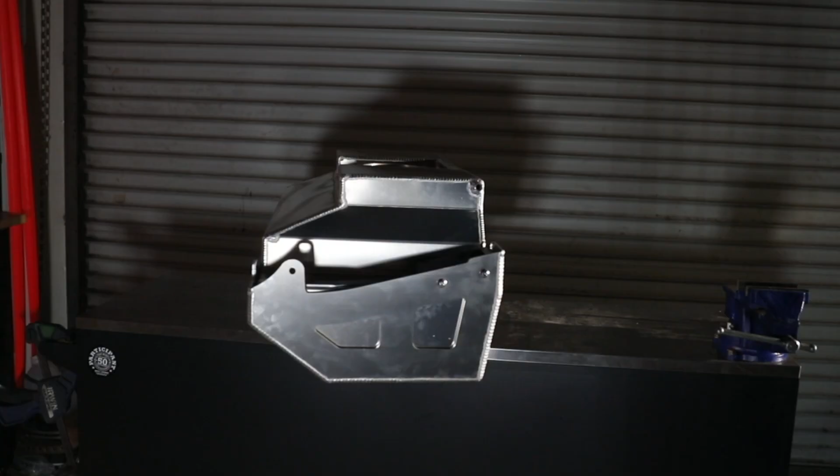Gas tanks were my very first product that I ever did. It was born out of my own necessity. I had put a Dana 60 rear end in the back of my YJ, went out the driveway, and bam, that rear end hit the tank, the stock tank, mind you, with an aftermarket skid plate. And I realized, hey, this isn't gonna work. I talked to a few people, everybody said, oh yeah, we just shortened the wheelbase a little bit, and I was like, no, that is absolutely the wrong way to go. I'm putting a bigger axle in to run bigger tires. You want a longer wheelbase. Shortening the wheelbase was absolutely not an option.

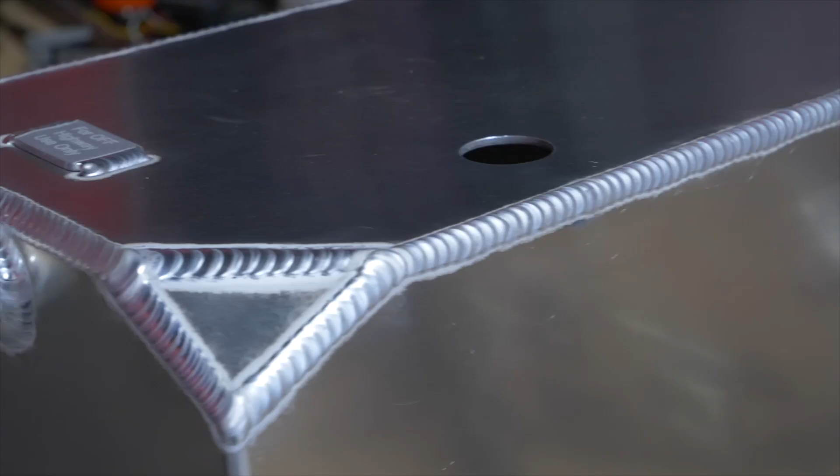I designed and built a tank that had a recess in it to allow the bigger rear differential to clear the gas tank, mated it with a steel skid plate, and this baby was born. It accepted the factory YJ pump module. We reused all factory Mopar vent valves and gaskets, and that tied back into the charcoal canister and the evap system. We did billet machined fittings to accept all the factory hoses, and basically it was a replacement tank with a slightly different shape. And we included things like baffles so that the fuel didn't slosh from side to side. These little holes just allow the fuel to move slowly, and things like this were really game changers in the whole design of the tank.

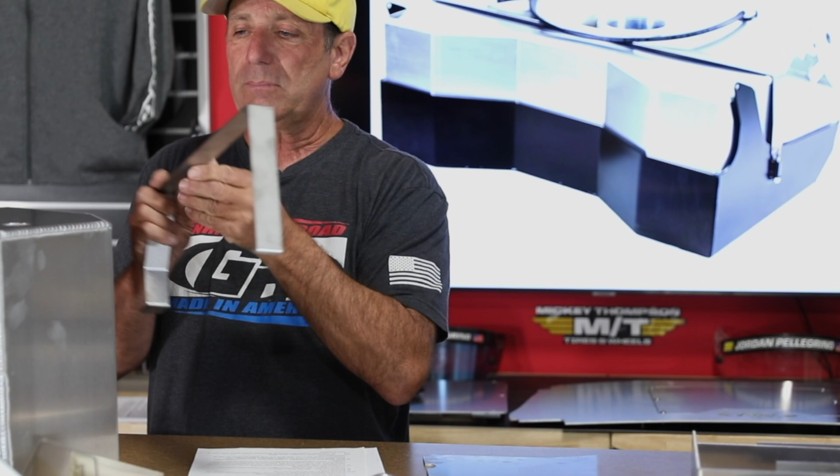And then on top of that, we held the whole thing in with stainless steel straps to lock them into the skid plate so that in the event of any kind of trouble, that tank would stay with the skid plate. So really innovative for its time. Keep in mind, this was 20 years ago we did this.

And now we make tanks for CJs, YJs, TJs, LJs, JKs, XJs, and JLs. So we've got a wide range. And by the way, there's 30 different models in all of that. So we do some with extra capacity. We do some that give you extra room. So you can go over on our website and check out all the different varieties we have for your vehicle. You can go to shop by vehicle, or you can just go straight to products, and that'll take you right to gas tanks.

So now I know you're wondering yourself, why does this apply to me, right? Well, if you wanted to carry an extra 5 or 10 gallons of fuel without having to wrestle with gas cans, one of our gas tanks may be the right solution for you, because it keeps it all down low, protected with a skid plate. You're not having to mess with fuel and transferring fuel.

Or if you want to stretch your wheelbase, just like I was showing you here, where you could move that rear axle back, a bigger rear axle on top of that, move it back, and we make different amounts of stretch, 3-inch, 5-inch, 7-inch, 9-inch. We've got all kinds of different options for you. Or if you want a 4-link rear end, like one of the current JK or JLs, you're gonna need one of our tanks. You gotta move it from the side, get rid of that, move it to the rear, and again, still reuse all your factory fuel pump, evap system, everything.

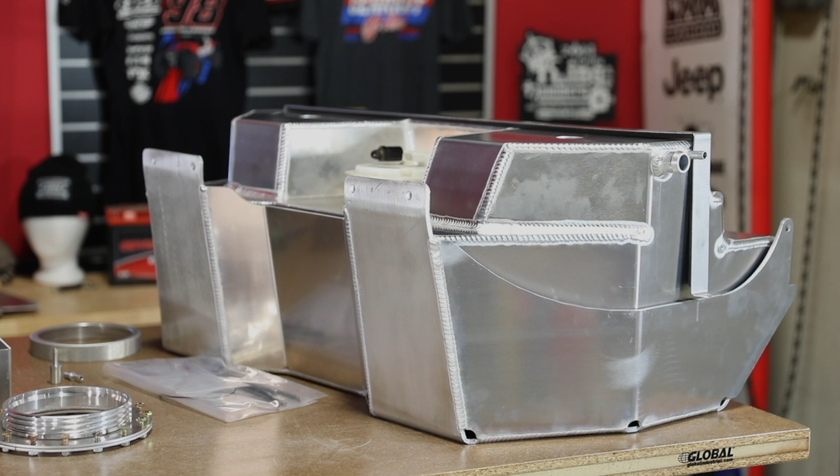Those are all things that having an in-tank fuel pump is going to help with, and this gives you that ability. Lastly, maybe you just want a bigger tank, maybe you want 5 to 10 more gallons of fuel, and what that's going to do is allow you to carry it in the tank that's mounted underneath. You're not wrestling with gas cans.

We offer aluminum skid plates, steel skid plates. Like I mentioned, they're all strapped in with stainless steel, a single strap or double straps, and they retain your factory fuel pump along with the factory Mopar vent valves, two of them on each side, really nice. All these things reattach to your evap system, your charcoal canister, and are not going to give you check engine lights on your dash or mess with your OBD2 system.

So a lot of things have been incorporated in here that really make putting one of these gas tanks in super easy, and like I said, it sets the stage for everything else that you want to do on your Jeep. All right, let's go and start talking about the specific models.

Oh, I just hit the wrong button.

Okay, so here's a good example. When we did our Tracer LJ, we came up with a 7-inch stretch tank that holds 26 gallons. So even though you're getting the stretch, you're still able to carry a large amount of gas. Over the years, we've been able to better design each of these tanks and maximize the space that's underneath the Jeep. And I'll give you an example.

So we start out with our EXT that gives you like 4 to 5 inches of stretch. All of this depends on the rear axle you have. Our Comp, or New Comp, which is 6 to 7 inches. Our Alien, 8 to 9 inches. Our Extended Range, which gives you 5 more gallons. Or our Safari, which gives you 11 more gallons.

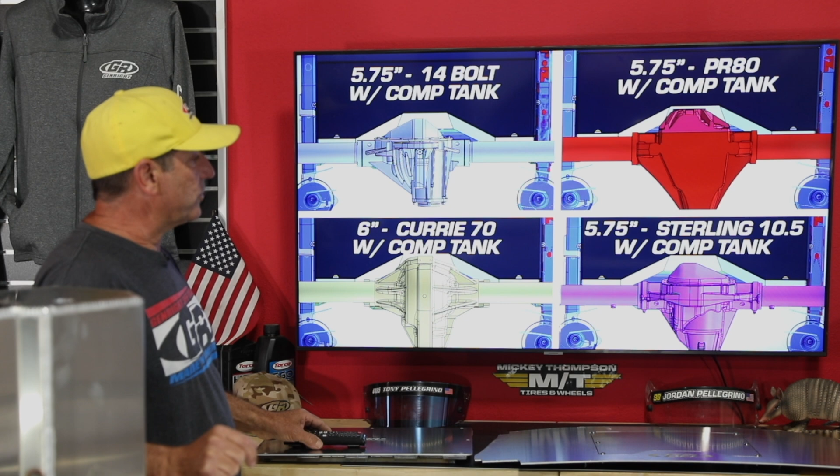All right, so here's a great example. We get this question all the time. What if I'm running a 14 bolt? What if I'm running a Currie or a Sterling or a Pro Rock 80? This shows you exactly how much stretch you can do.

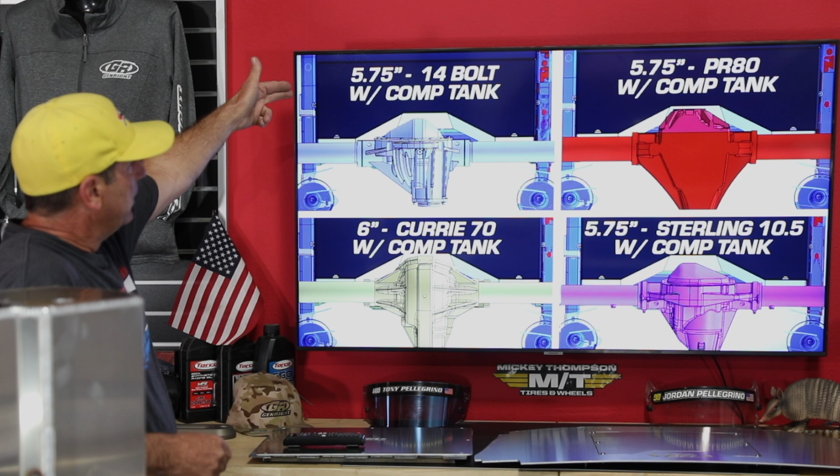So basically, it's 5.75 inches with everything, except for the Currie, you can get 6 inches. And that's why we chose to run the Currie in all of our builds, because we're able to maximize everything with that. But you can see it works with all the different axles, and that the shape we've done of that big cutout really allows you to get some clearance and move that rear axle back.

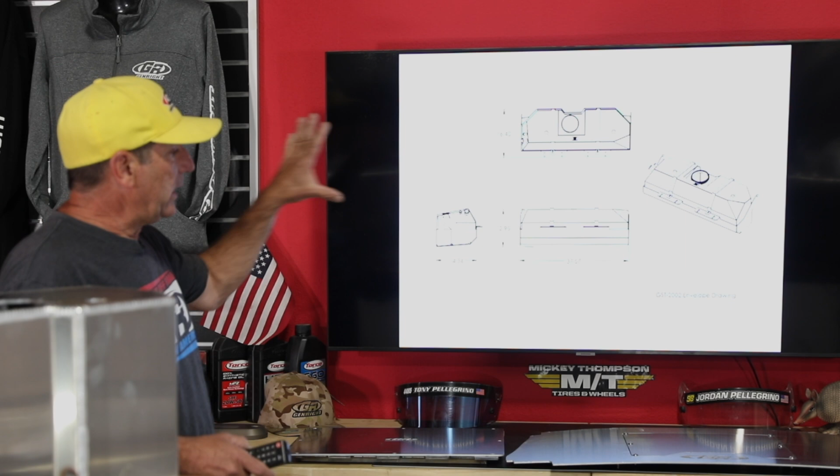If you go to our website, on each tank model, we give you what's called an envelope drawing, so you can get under your Jeep, take some basic measurements, and make sure it'll fit the rear axle you've chosen and get the amount of stretch you want. So this is our EXT.

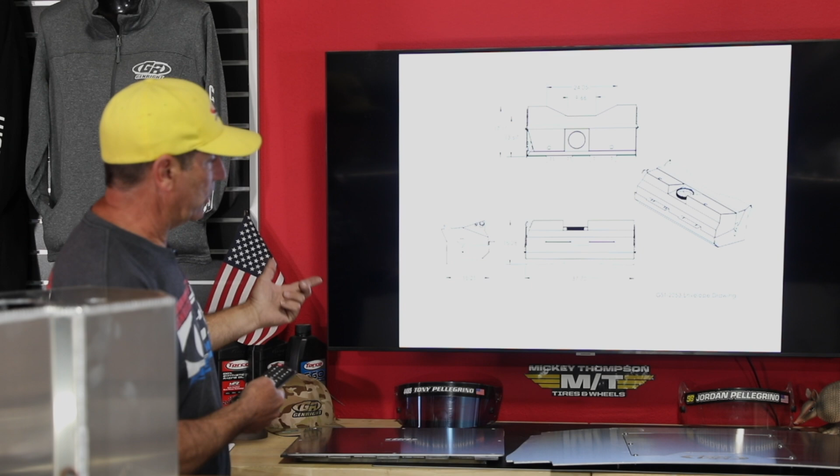Then we've got our extra capacity tank, so you can check that one out. Then here's our 7-inch stretch one, and our 9-inch stretch. You get to look at all the different dimensions. And then this is our oversized 31.5 gallon.

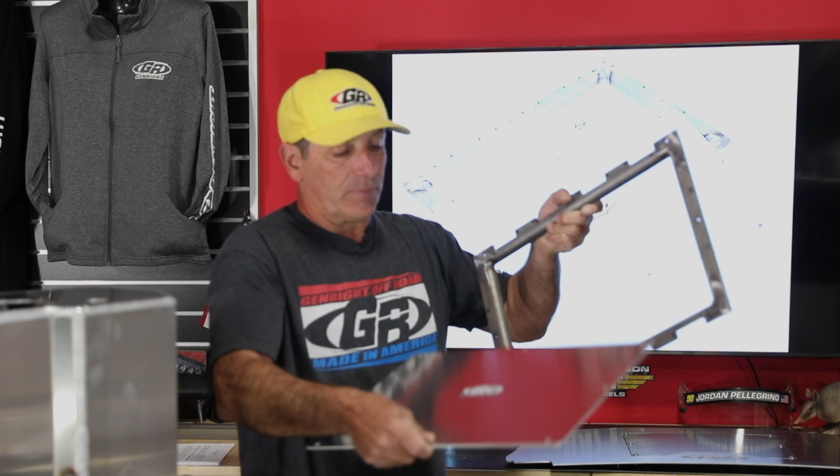Let's talk about this. We always recommend our fuel pump access plate. This is a really nice piece you'll want to invest in at the same time you're changing your tank. It's made out of 3/16 steel, pre-welded together for you, and each notch allows it to sit flush in the floor. I made a large radius on the edge, so if you're reaching in to work on your fuel pump, you won't cut your arms, and this is really strong.

Even though you're cutting out a portion of the cargo area floor, when you put this in, it's stronger than what was there. So you can still stack your tools, stand in there, whatever you want to do. Then you just put the cover on, and your floor is flush and flat—you don't even know it's there. But if you ever need to get to your fuel pump, it's really nice.

Now, on a JK or JL, it comes with that because there's a recess in the floor that you need to take out, and we already give you a cover plate, so you're getting a fuel pump access panel—pretty nice too. Those are all options with each tank as well. This is another plate we offer for those guys with an LJ, and this plate allows you, by stitch welding it in, to cut out the faux cross member that exists in an LJ.

You can move the entire tank back, so you can still run a 25-gallon tank and move the rear axle back up to 5 inches. We give you guys a bunch of different options for whatever you're trying to do. Again, just check out our website or call in and talk to our guys, and they can help advise you for what you want to do.

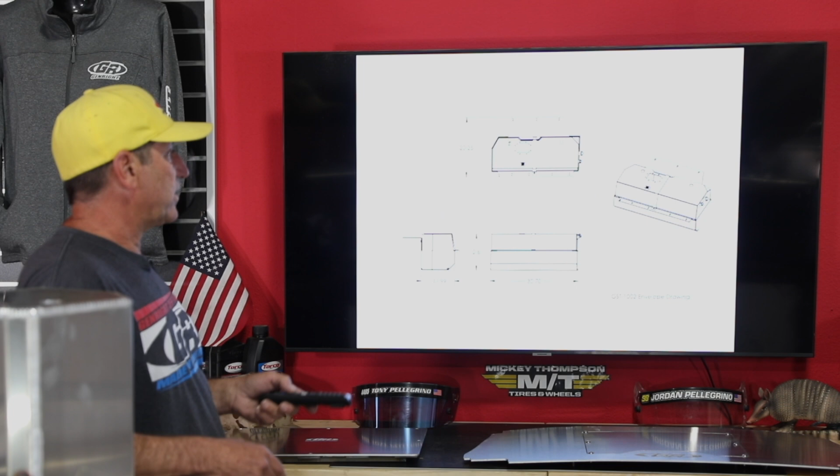Now, similarly on the CJ and YJ, we offer that same tank, and you can go over to the website again and look at each one and check out the drawing. This particular one happens to be a CJ, and if you'll notice, it's got the YJ bolt pattern plate on it. That's because we encourage all the CJ guys to switch over to an in-tank fuel pump, and the YJs are readily available, so it's a really easy switch.

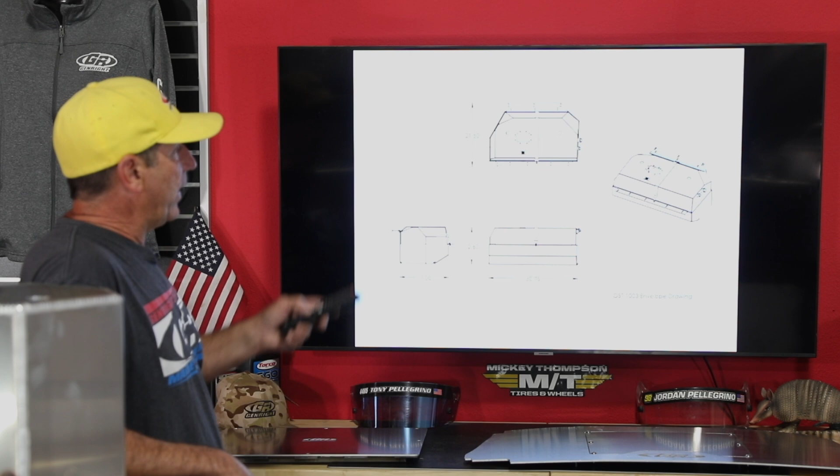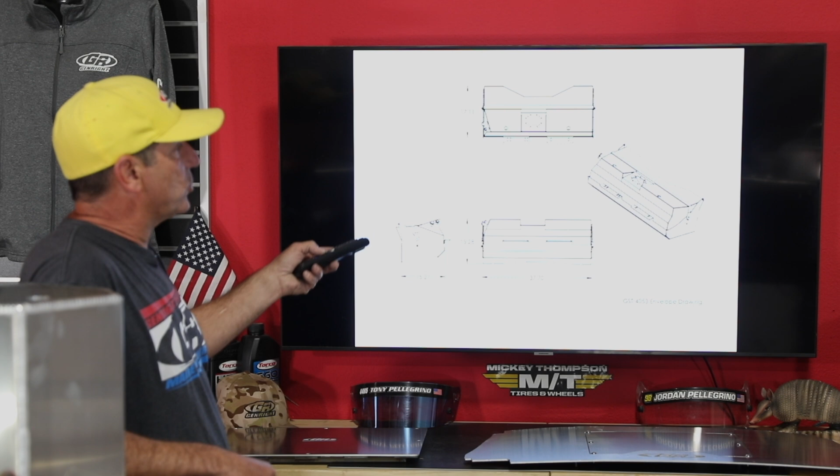And that's a stretch tank. Here's a standard—this would be like a 20-gallon replacement tank for the CJ. Then here's a YJ stretch tank, and a YJ 20-gallon replacement tank. Each one of these includes a steel skid, a powder-coated steel skid, or you can get an aluminum skid upgrade. And here's the 7-inch stretch, what we call the new comp for the YJ. That's a real popular tank if you're doing coilovers, outboard shocks, that whole thing.

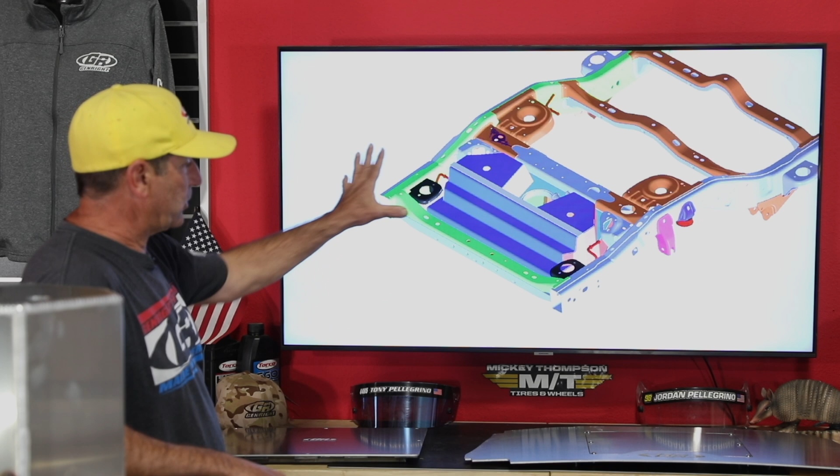Okay, then in the JK and JKU, this even gets better because we've really been able to maximize, especially if you're getting our Elite suspension. So leaving the factory shock mounts, body mounts, everything, you're able to go up to a 25-gallon tank—standard is 20, this is 25. Keep in mind, your factory tank is mounted over on the side; you're now going to be relocating that and putting it in the back. You can still use all your evap system and everything and just directly install this.

Again, this tank, just like the one sitting here, comes with an aluminum skid or a steel skid—that's your option. And if you want to upgrade and go to our JK Elite system, we take out this cross member and these two shock mounts, and then you can utilize all that space and go up to a 36-gallon tank. So really nice.

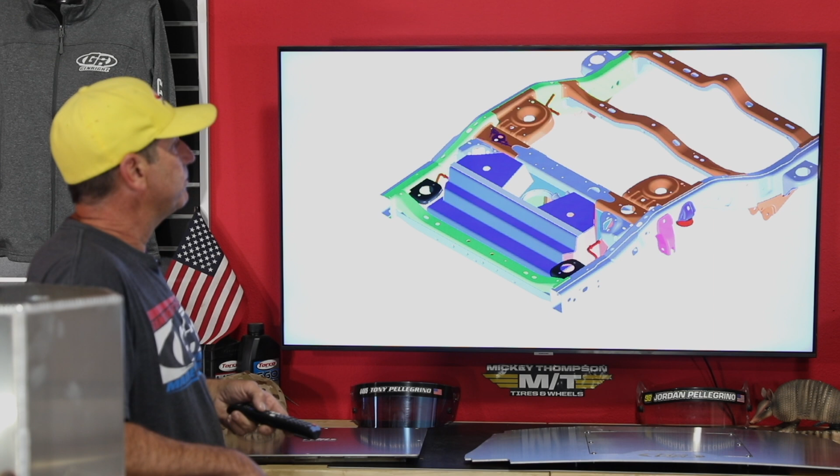Here's an example of that 36-gallon. This happens to be the one I'm running in Terremoto. That's actually a complete fuel cell—a rubber bladder with a fast fill—and that accepts an Aeromotive in-tank fuel pump. In my case, I run a dual Aeromotive. So those are all options as you're doing your upgrades.

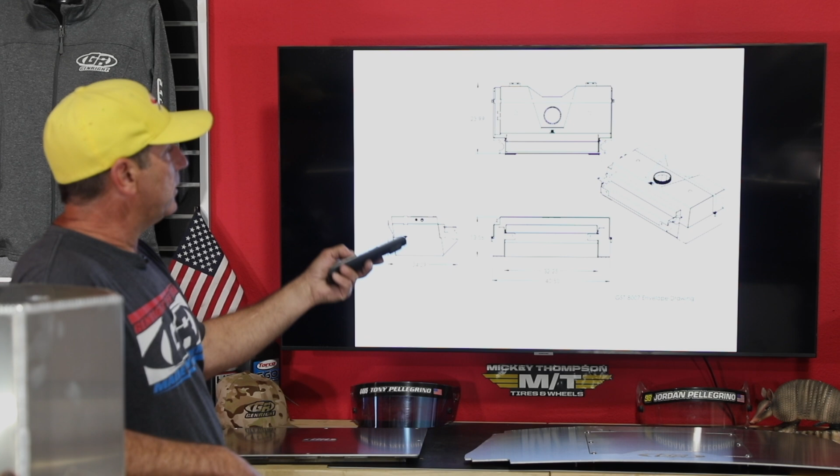Again, we give you all the envelope drawings, right in the pictures for each tank that we have on the website. There's the 25-gallon and the 20-gallon version, so you can check all those out.

Then, brand new for the Jeep JLU is our brand new aluminum tank, and this is really nice. Again, it ties back into the factory evap system. This one only comes with an aluminum skid plate—we're not even making anything else an option. It is also foam lined, and it also reuses the factory fuel pump, and you reconnect the filler hoses.

Again, very easy to use, and this brings you up to 25 gallons. So pretty nice upgrade, and moving the tank to the rear so that you can do that 4-link that you've been wanting to.

All right, then lastly, we offer a set of universal tanks. These are what we commonly call behind the seat tanks or in the cargo area tanks. This is really a last resort because ideally you'd like to keep that tank down underneath where the center of gravity is low. These actually sit up a little bit higher. We offer these for the CJ and YJ and also for the TJ.

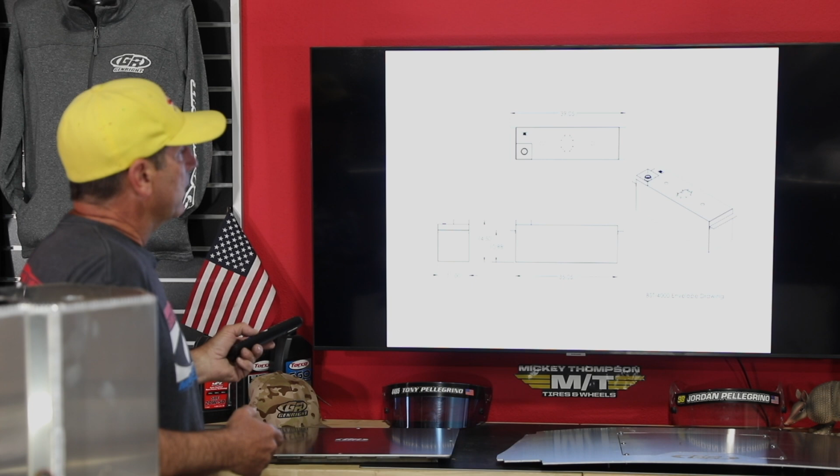We offer heavy duty tanks. These are also 1/8 inch thick tabs to bolt the tank down for the CJ and the YJ to the inner fender well, and again, you can see the envelope drawing. And then for the TJ, we offer this one.

Now, if you notice, both of them had this square thing with the cap down inside. That's what we call a dam. So if you overfill the tank or something happens, the fuel just doesn't run all over. There's a vented gas cap right there.

And then the tank is held in place with stainless steel straps. Everybody else on the market puts these thin little metal tabs down on the bottom, and they always crack and break off, and they leak as soon as that happens because they're welded directly to the fuel tank. Not a good idea. You want straps like this.

We reuse the fuel pump, and then we also show an aftermarket sending unit. So if you're not using the one with the little arm, you can use this one as a bubble style, and those are quite popular. People like those. And here's a close-up of that little fuel dam that you can see and the little rollover valve.

And then on this tank, the whole thing gets a cover. And that way, if you're putting tools or throwing straps and stuff in the back of your Jeep, you don't stand a chance to hit the top of that plastic fuel pump.

So all super important. And then here's we offer this little adapter ring. So if you order a CJ tank and you don't want to convert over to the YJ fuel pump module, you get a plate that looks like the YJ fuel pump module. You drill a hole in it, and then you remount your factory CJ pickup tubes and sending unit right in that. So again, we still offer that as an option for you too.

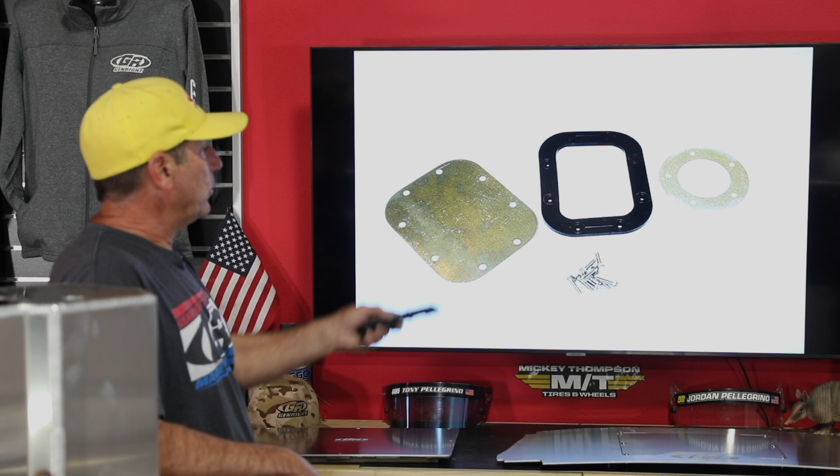And there's what the little kit looks like. You reuse the factory style YJ gasket, and then underneath there's a little O-ring that you reuse that came with your CJ fuel pump.

So the important thing is each of these tanks is what we call CARB compliant. They're just a replacement tank. You're reusing all of the factory equipment, and you just put the tank in and you will get no check engine lights. You don't want to modify or start taking away smog equipment. You're just asking for trouble. Just reuse everything, and you will pass with flying colors.

So the other thing I want to remind everybody is that every one of these tanks is pressure tested for 24 hours. As you know, air is thinner than liquid, so we know if it holds air, it'll definitely hold liquid, and every one of these tanks gets tested for that.

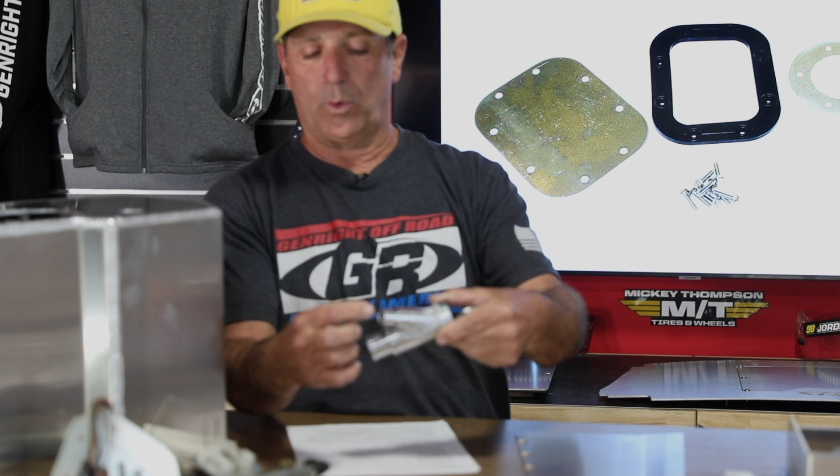The other thing I want to mention is if you relocate your tank and you can no longer, based on how much stretch you've done, need to set up a brand new fuel filler and vent, we make this nice little billet one that you can put wherever is convenient for you in your inner fender well or whatever you're doing. Super nice, got a nice O-ring on there, and super easy. It's basically a one size fits all. You just slide the hose on to whatever size you have and then plumb it to your tank. So these come with little pieces of hose based on the one you select off our website. So check that out when you get a chance.

For all of you that go, oh no, I want to build my own, or I'm going to buy some plastic tank or whatever, we do offer for the TJ, LJ, JK, JL, a universal pump ring. This is where you just cut a hole in, you sandwich this on with some silicone, and then you can adapt over one of the fuel pumps to your tank that you have.

So we've given you guys lots of options. And I do want to remind you, since we started our company with this, we've got sufficient product liability insurance. We've been doing this for almost 20 years. These are very, very dialed in. The instructions are good. We know these work, and we offer 30 different models. So we've really got you covered. And if you have any questions, check out our website or just call in.